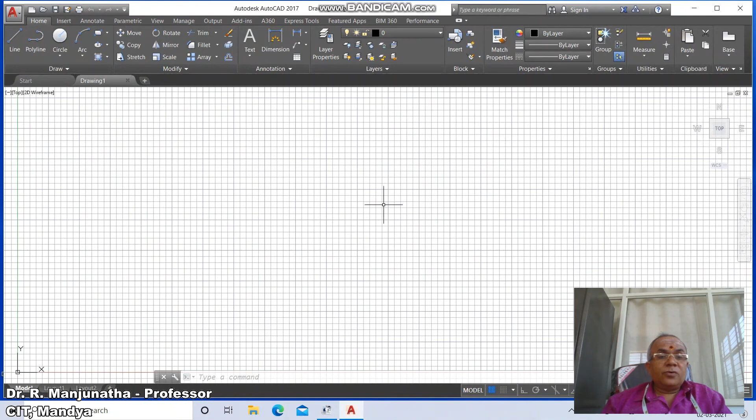How to solve the projections of solids by using AutoCAD software. So just go to the AutoCAD screen, switch off the grid mode, switch on the ortho mode, command type limits, go to lower left corner 0,0, upper right corner take 297,210, then zoom all.

Then go to line, take an arbitrary point on the lower left corner of the screen, click on the first button of the mouse and drag the mouse to the right side. Take some distance and click on the first button of the mouse and drag the mouse to the upper side. Then take some distance and click on the first button of the mouse.

Then go to offset, take the distance as 297. Select this vertical line and offset to the left side. And again take offset, take the distance as 210. Select this horizontal line and offset to the top side. Then go to zoom, extents and zoom 0.5x.

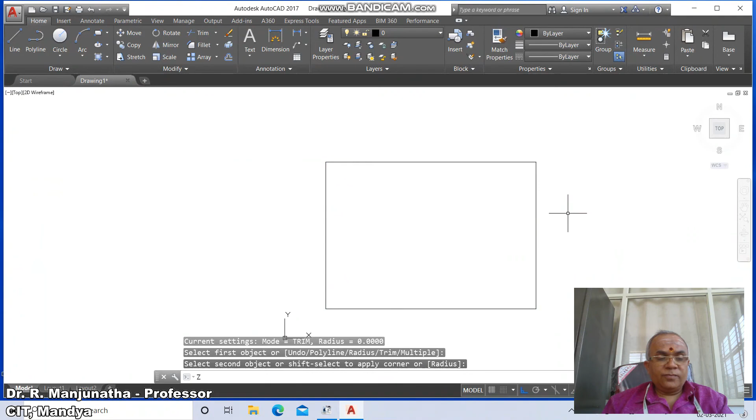Then go to fillet between this vertical line and this horizontal line. Fillet between this vertical line and this horizontal line. Fillet between these two. Then go to zoom window. Select this and go to D-text. Specify start point, take some point and click on the first button of the mouse and specify height as 4, rotation angle as 0, and type the problem number 144.

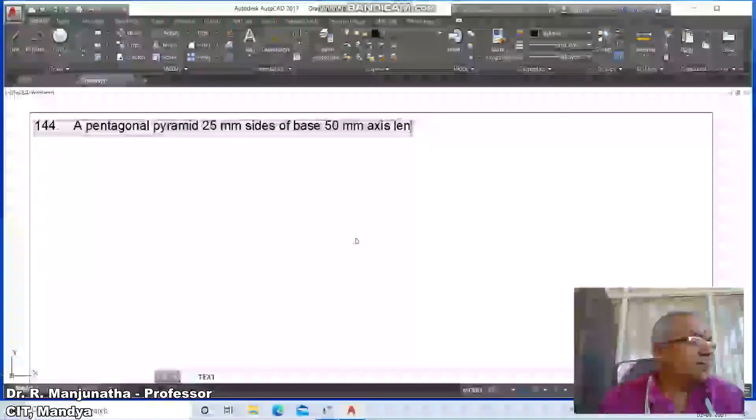Take a pentagonal pyramid, 25 mm sides of base, 50 mm axis length, rests on HP on one of its corners of the base such that the two base edges containing the corner on which it rests make equal inclinations with HP.

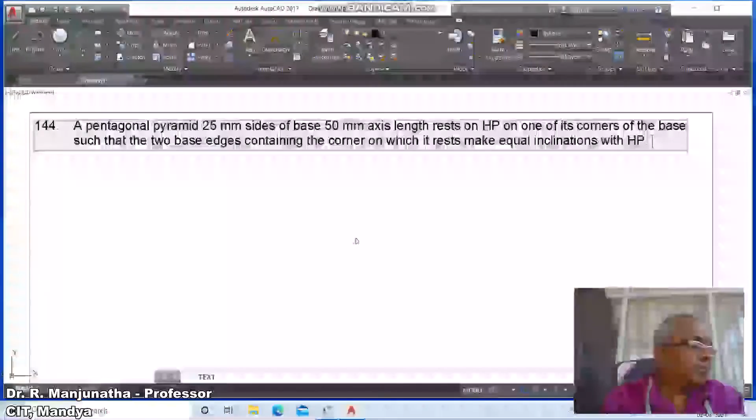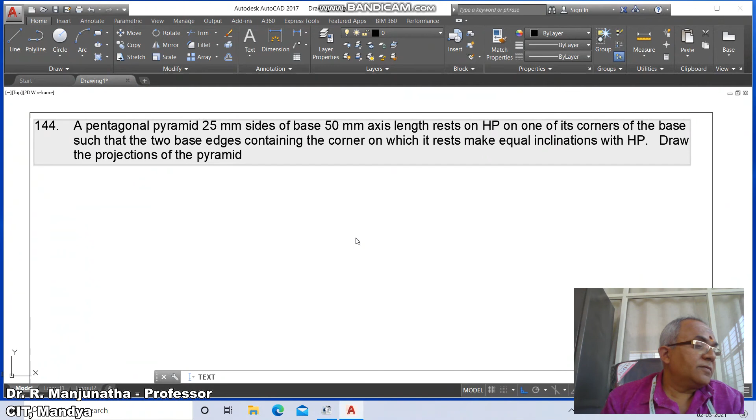Draw the projections of the pyramid when the axis is inclined to HP at 40 degrees and appears to be inclined to VP at 45 degrees.

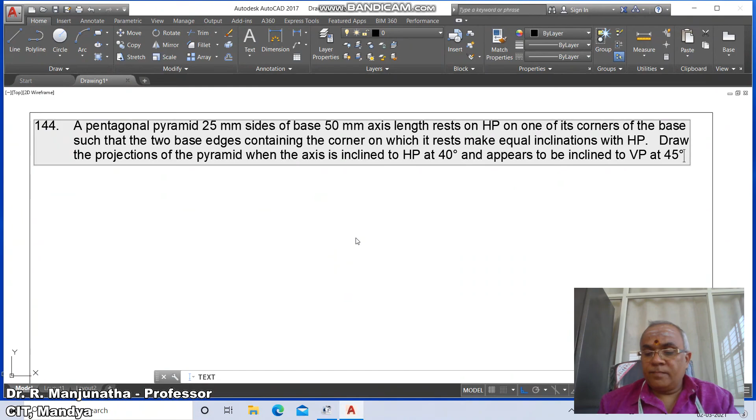So now once you have this, now we're going to create the layers. So first we'll go for the zoom window and then go to layer, click on new, type the layer as XY and enter. Click on new, type it as visible, then click on new, type it as invisible, then new and type it as axis.

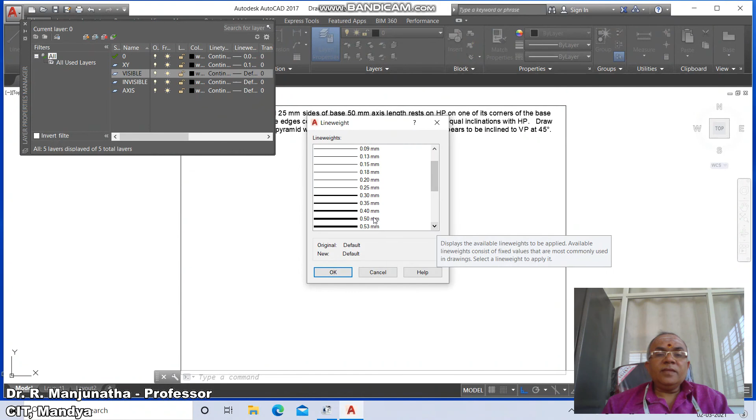Then go to layer 0, click on the line weight of layer 0 and make it 0.05 and say OK. Click on layer XY, the line weight of XY, make it 0.13 and say OK. Click on visible line weight and make it 0.5 and say OK. Click on invisible layer line weight, make it 0.3 and say OK. Click on axis, go to

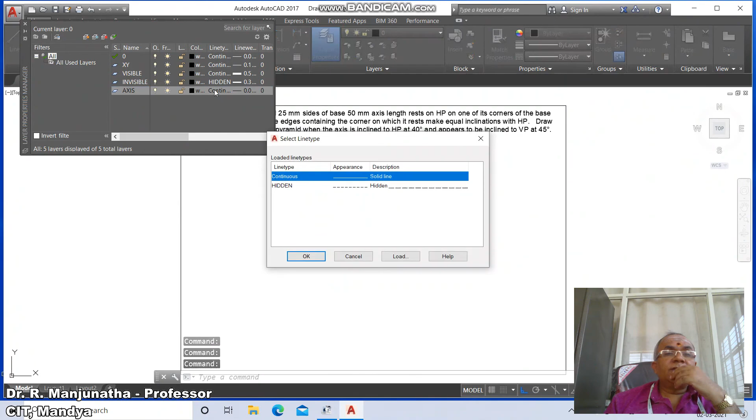0.05 and say OK. Then go to the invisible layer line type, click on load, click on hidden and say OK, and click on hidden and say OK. Then go to axis, click on continuous, click on load, take this as center and say OK. Click on center and say OK. Once you do that, then close the layer command.

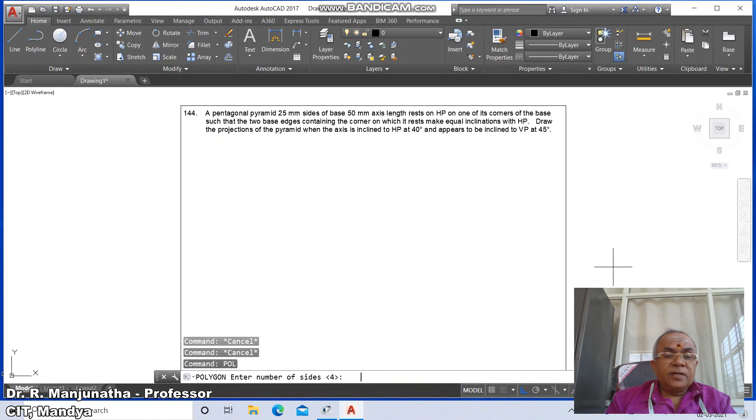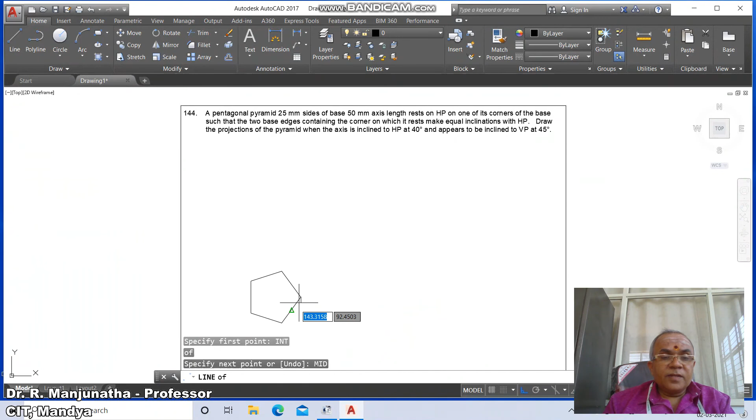Now we go for polygon. Select the number of sides as 5, take the edge option, select the first point of edge, drag the mouse downwards and take the distance as 25. Then go to line, intersection point of this and take midpoint of this. Then go to line, take intersection point of this and take perpendicular to this line. Then go to fillet between these two.

Then go to line, take intersection point of this and intersection point of this and intersection point of this. Then go to line, take intersection point of this and intersection point of this. Then select and go to CH, then go to layer, change it to visible layer, and then go to line and draw a horizontal line and take the offset distance as 50. Select this line and offset to the top side.

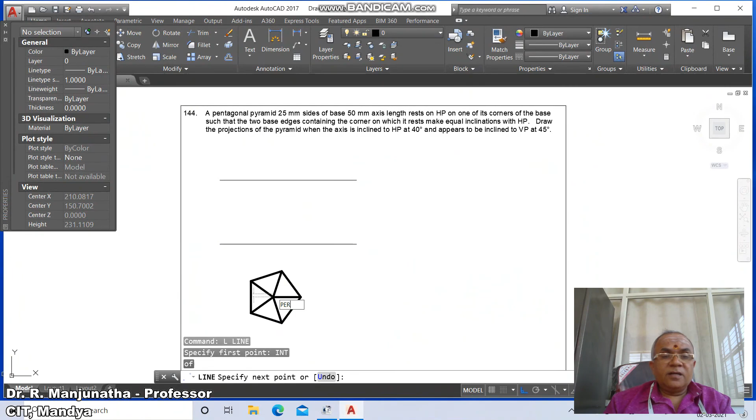Go to line, take intersection point of this and draw perpendicular to this, then go to line, take intersection point of this and draw perpendicular to this, and then go to line, take intersection point of this and draw perpendicular to this, and then intersection point of this and intersection point of this, then go to fillet between these two and fillet between these two.

Then go to erase, then go to break, select this line and break this till here, then select these 4 lines, go to layer, change it to visible layer, then select this line and click on axis, and make this line type scale 10, then escape, then go to group.

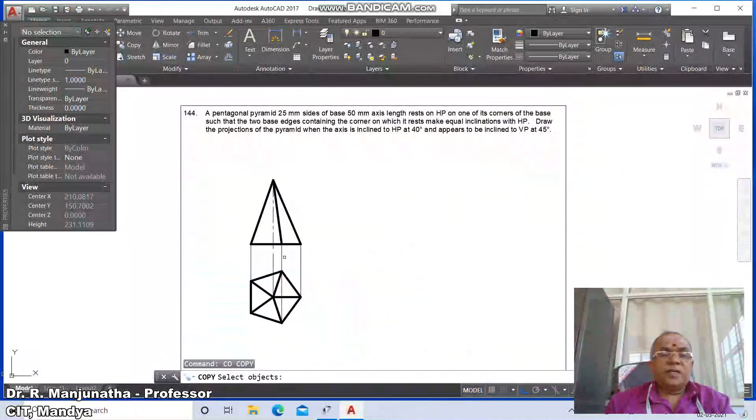Select these objects, you select this and you select this line, enter, then go to copy, select this, copy this to the next position, and then go to rotate, select objects, you select this and take intersection part of this and take the rotation angle as minus 50 degrees.

Then go to line, take int of this and then go to line, take int of this and go to fillet between these two, then go to line, take int of this and draw perpendicular to this, then go to line, take int of this and then go to line, take perpendicular to this.

Then go to line, take intersection point of these two, vertical line and take line, intersection point of this and draw perpendicular to this, then go to line, take intersection point of this and draw perpendicular to this, then go to fillet between these two, then go to line, take int of this and draw a horizontal line, vertical line.

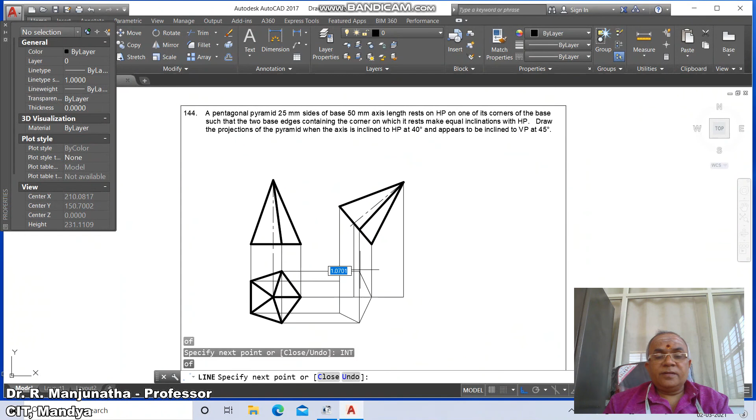Take line, int of this and draw perpendicular to this, then go to line, take intersection point of this and draw perpendicular to this line, then go to fillet between these two, then go to line, take int of this and take intersection part of this and take intersection part of this, and now to line, take int of this and take intersection part of this.

Then go to line, take intersection point of this and int of this and intersection point of this, then go to break, select this line, take first point int of this and say at the rate, break first point int of this and say at the rate, then break first point int of this and say at the rate, and break first point int of this and say at the rate.

Now we go for line, take intersection point of this and draw a horizontal line and take line, intersection point of this and draw a horizontal line. Now we go for visibility and invisibility.

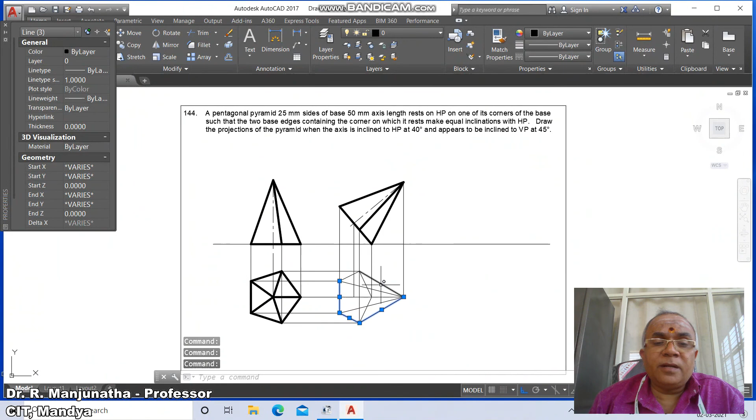First we will click on this, all the exterior edges of the boundaries of the solids are visible. You select this and this; surfaces which are near to the observer are visible. So this triangular surface is visible. You just go to layer, change it to visible.

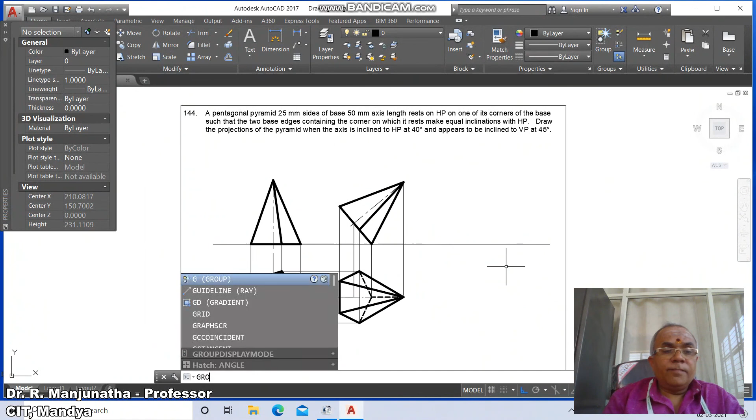Then you just go to layer, go to this and make this line as the axis and select this and take it as 5. Type it as 5 and enter. Then escape. Then go to group, select this entire thing and group it as a single entity.

Then go to copy, select this line here, then go to rotate, select this, take the rotate as intersection of this and take this angle as 45 degrees. Then go to move, switch off the ortho mode, select this, move it here. Then go to line, take intersection point of this.

Switch on the ortho mode, draw a horizontal line, take line int of this and draw perpendicular to this. Then go to fillet between these two, then go to line, take int of this and draw a horizontal line, take line int of this and take perpendicular to this.

Then go to line, take intersection point of this and draw perpendicular to this. Then go to fillet between these two. Then go to line, take int of this and draw a horizontal line, take endpoint of this and then go to fillet between these two.

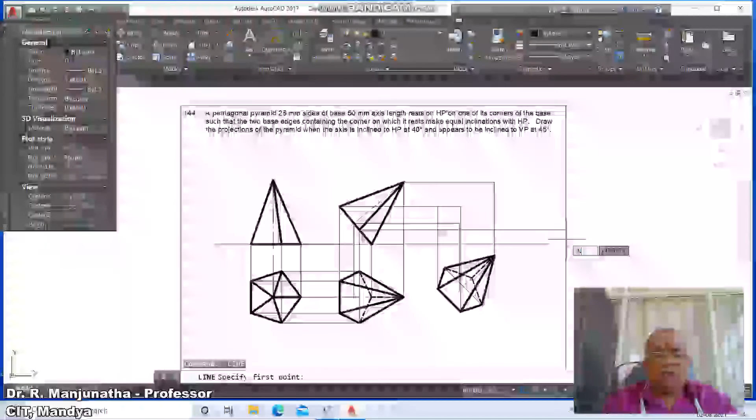Then go to line, draw a line from intersection point of these two lines and then go to line, take intersection point of this and draw perpendicular to this. Then go to line, take intersection point of this and draw perpendicular to this. Then go to fillet between these two.

Then go to line, take int of this and draw perpendicular to this. Then now go to line, take intersection of this and int of this and intersection point of this and take int of this and take intersection point of this and take int of this and take intersection point of this.

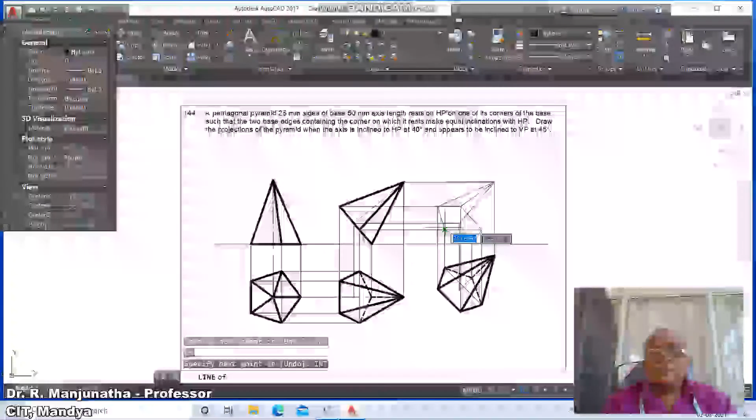Similarly, line, take intersection point of this and take int of this and then go to line, take intersection point of this and int of this and take int of this.

Then go to zoom and here you just break this line till here, first point, int of this, and now all the exterior edges of the boundaries of the solids are visible. You make these exterior edges of the boundaries of the solids visible, and the surface near to the observer is visible. Then the entire pentagon surface is visible. As these two edges are visible, naturally this edge also becomes visible. So you take it as the visible layer.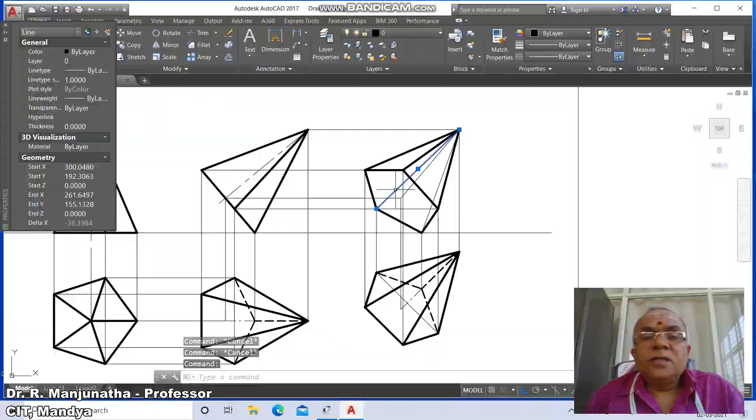Then once you get this, now these two edges are crossing the visible edges. Two visible edges can never cross each other, therefore that becomes invisible, and this distance is 15. Then go to this line, make this layer as axis layer and change the line type to 10 and say escape. Then go to previous, then go to break, select this line and break this till here, then go to erase. Then you select this line and this line, go to layer, make this layer as xy.

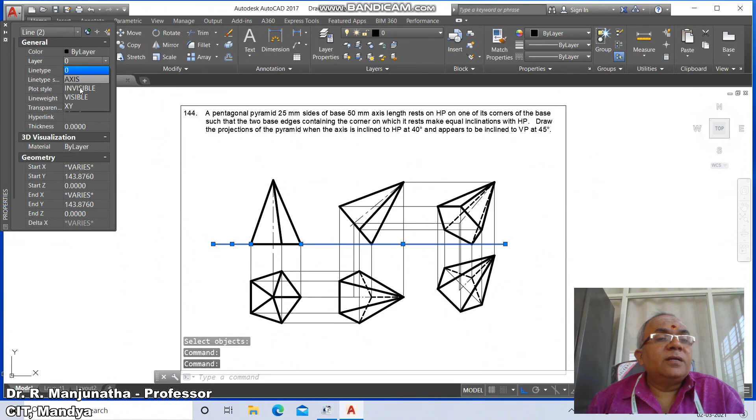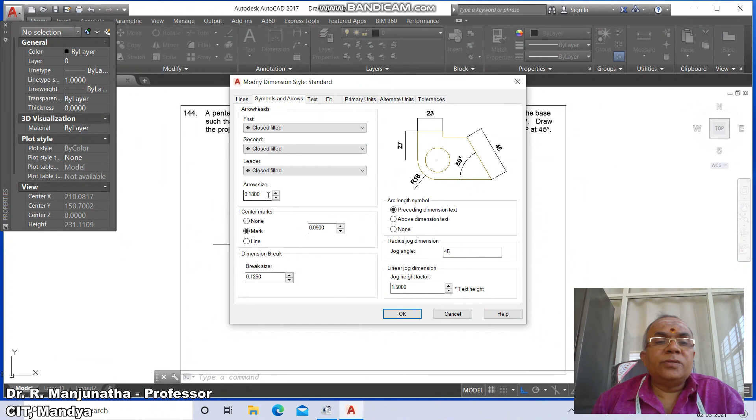Then go to DDIM, select modify, then click on primary units, make it as 0, then go to text, take it as 4, align with the dimension line, centered is above, take offset from the dimension line as 3, and then go to symbols and arrows, take the arrow size as 4, then go to lines, take the offset from origin as 3 and say OK and then close.

Then go to dim vertical, select this line and make it 25, and dim vertical, take intersection point of this and int of this, and take this distance as 50, and dim angular, select this line and this line, you make this angle as 40, and then dim angular, select between this line and this line, you keep it as 45 degrees.

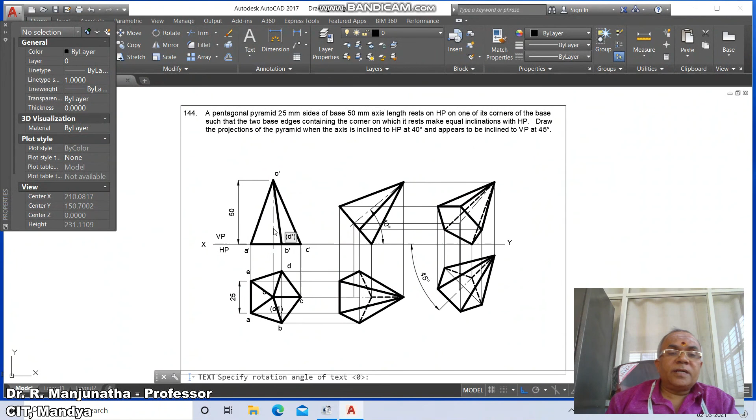Then go to the text, switch on the ortho caps lock, capital X, capital VP, capital HP, capital Y. Then switch off the caps lock, you type A, B, C, D, E and you type O and here you type O1. Then go to O dash and here it is A dash, here it is B dash, here it is C dash, here it is D dash in bracket, then it is E dash in bracket and here it is O1 dash in bracket.

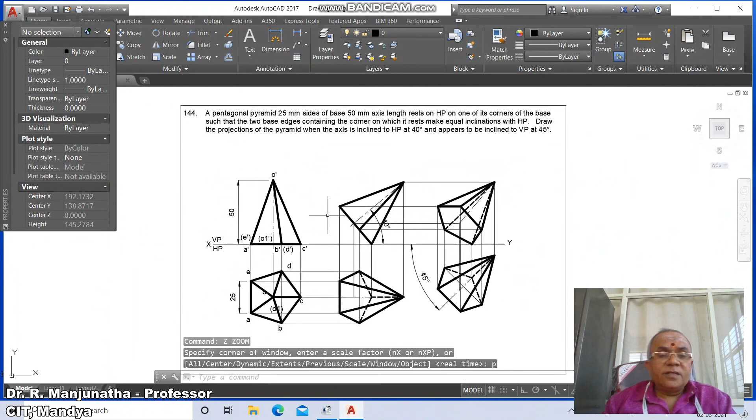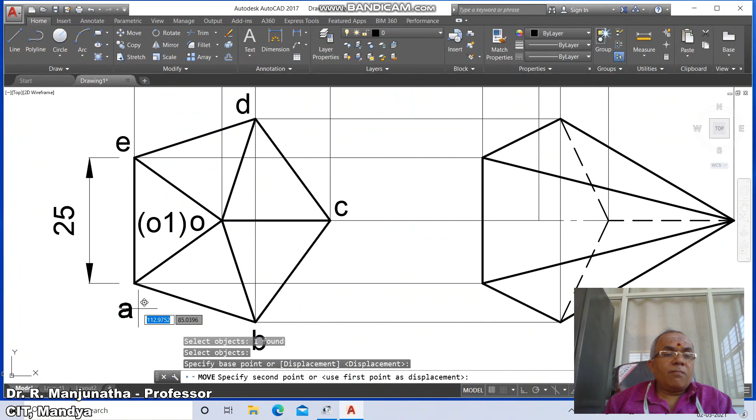Then go to zoom window, select this, then escape, then go to move, switch off the ortho mode, type X, VP, HP, here A dash, here it is E dash, here it is O1 dash, here it is B dash, here it is D dash, here it is C dash, here it is O dash, and zoom previous. Here it is zoom window, select this, now move this C, B, here it is E, here it is O, here it is O1, here it is A, then zoom previous.

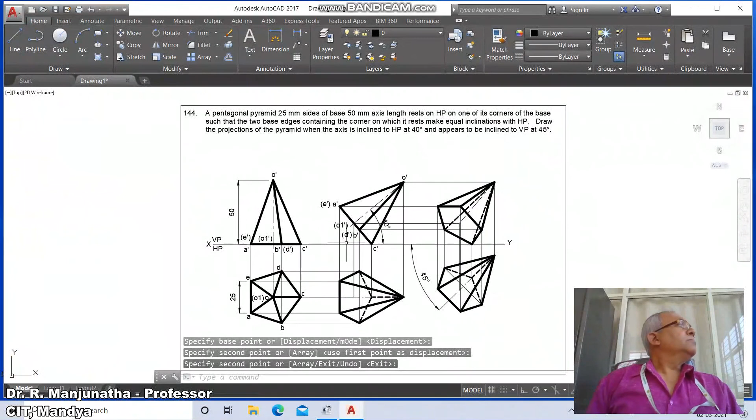Then go to copy, select C dash, copy this here, and you copy this O dash here, copy this A dash here, E dash, here it is O1 dash, here it is B dash, here it is D dash. Here it is copy, you take O, copy this here, and you copy this here. Here it is A, you copy this A here, then you copy this B.

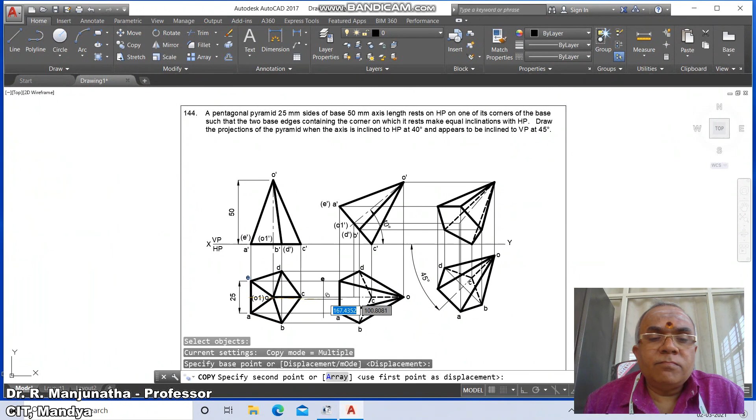You copy this B, you copy this C, you copy this D here, and you copy this E, you copy this O1 here and this O1 here, then go to the text. Here it is A dash, here it is B dash, here it is C dash, here it is D dash, here it is E dash, here it is O1 dash.

Since A dash, B dash, C dash, D dash, E dash, the entire pentagonal surface is visible, and O1 dash is on that surface, O1 dash becomes visible, and then O dash becomes visible. Then go to zoom window, select this, you move C dash, D dash, E dash, A dash, O dash, B dash and O1 dash, previous, and then go to DIMTEDIT, select this line and place the text wherever you want. Then 40 degrees you place it here, and this is how you will be able to complete the drawing.

And then finally go to save, come down to the appropriate directory, go to AutoCAD, go to all its drawings and type P144 and save it. And finally you will just go to